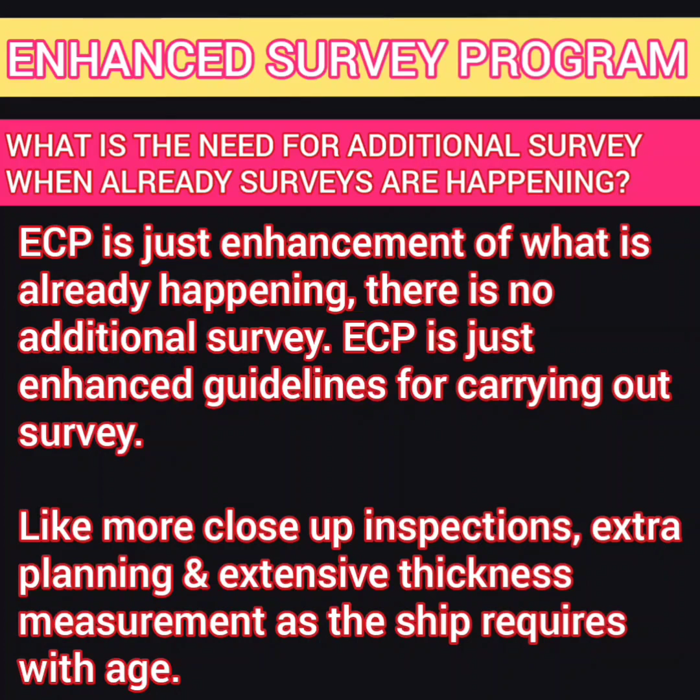Let me quickly tell you the contents of the ESP code. ESP code has two annexes, Annex A and Annex B. And these two annexes are further divided into two parts, Part A and Part B each. Annex A provides you the code on the enhanced program of inspection during the survey of bulk carriers, and Annex B deals with the code on enhanced program of inspection during the survey of oil tankers. The further subdivision basically is for single hull and double hull bulk carriers and oil tankers.

Now we have a code that we need to follow. So how do we execute it? The ESP code has a detailed instruction on the minimum criteria for inspection during each statutory survey. For example, you can see Annex 1 of ESP code defines the requirement for the close-up survey during renewal survey of the ship. Minimum survey requirement from the time when the ship is less than 5 years old to the time when it's more than 15 years old, all the instructions are provided.

As you can notice from this, as the ship ages, the extent of inspection is continuously increased. By the time a ship is more than 15 years old, all shell frames in all cargo holds, including upper and lower end attachment and adjacent shell plating, are inspected.

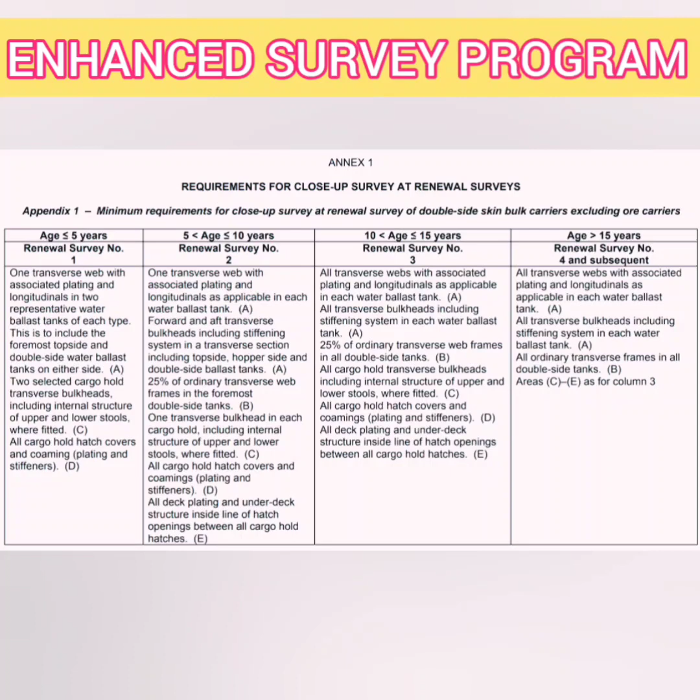Similarly, there is Annex 2 of the ESP code, which defines the requirement for the thickness measurement during the renewal survey of the ship. And from this Annex 2, you can notice that the older the ship, the more detailed and larger extent of inspection will be carried out. Thus, the guidelines given in the ESP code become the first source on the basis of which the survey program or survey planning document is developed.

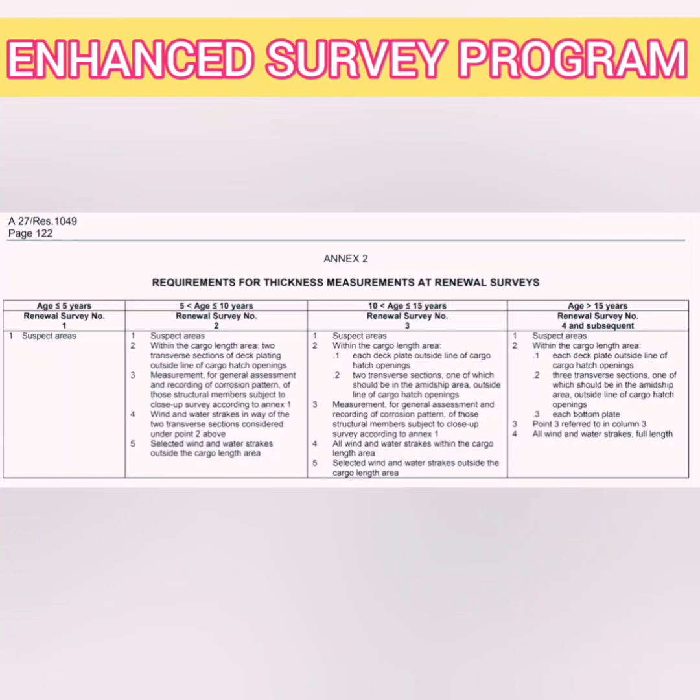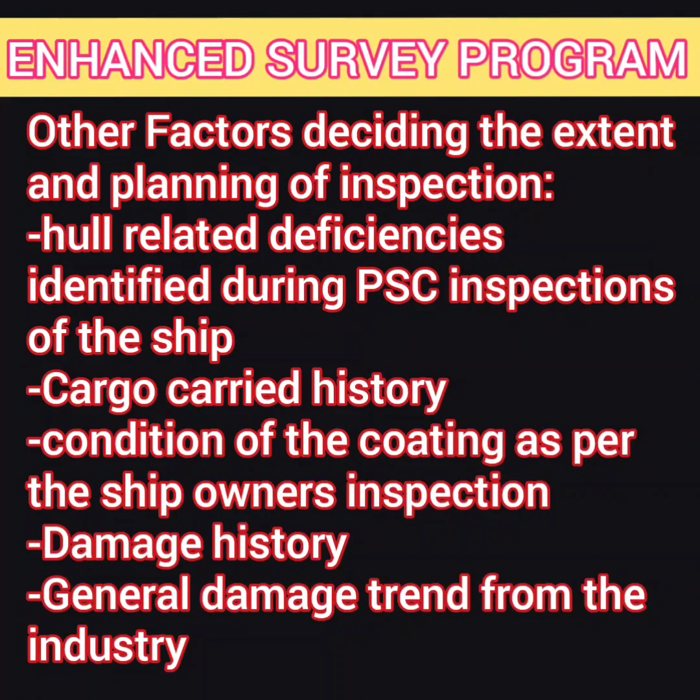Along with the minimum criteria provided by the ESP code, there are other factors which decide what kind of inspection and how detailed the inspection would be. There is a discussion that takes place between the ship owner and the classification society. Based on the feedback given by the ship owner, like the kind of cargo the ship has been carrying, any accidental history, or any suspected areas that have been reported by the ship personnel, or that have come from the experience of a sister ship, or the knowledge from the industry, all these factors together are considered to develop a program under which the ship will be surveyed.

Now that the program is already prepared in advance and the ship owner knows exactly what all points will be checked on the ship, it is the responsibility of the ship owner to keep everything prepared so that the survey can be completed safely. The developed plan is never a final plan. It can always be extended based on the outcome of the samples that are being taken. Let's say, while carrying out the thickness measurement of a particular bulkhead, the thickness is found to be reduced less than the maximum allowed reduction of the bulkhead. Then, obviously, more detailed inspection in that area is carried out, checking more bulkheads, taking more samples in that area.

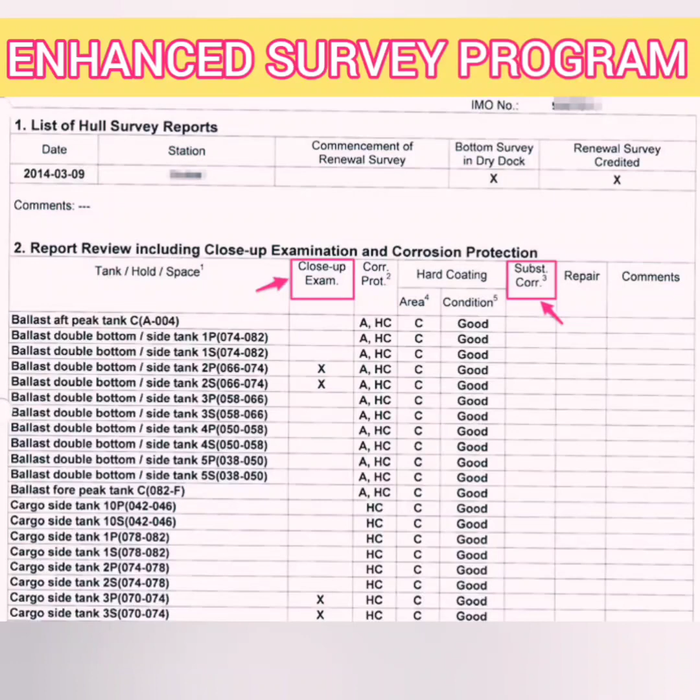Once the survey is complete, it is time for creating the report for the survey that will show the summary of all the surveys done and its outcome. And the report is called Condition Evaluation Report. This report gives the actual condition of the tank coating.

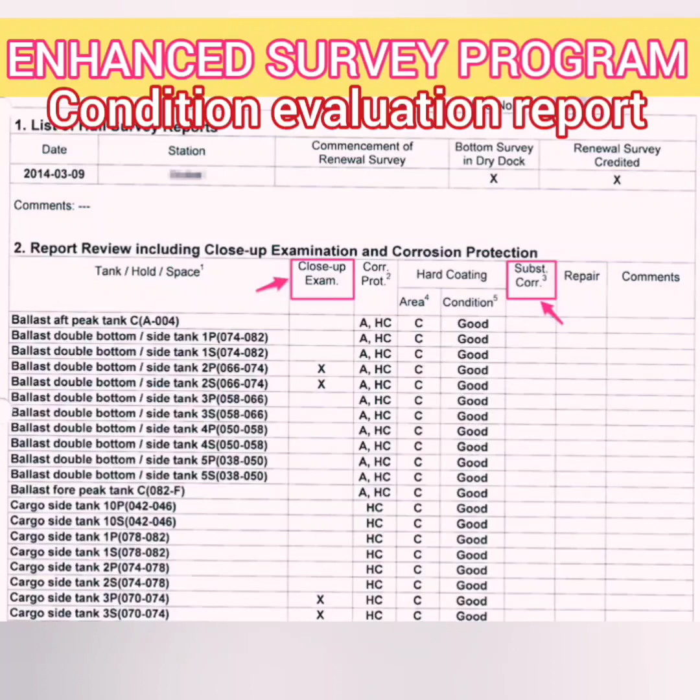As per ESP, the condition of tank coating needs to be defined in one of these ways. It can be called good, fair, or poor based on if only minor rust is there, local breakdown of coating is there, or a major breakdown of about 20% is there.

If a condition of class is issued to the ship as a result of the renewal survey, the details of the condition of class will be provided in the condition evaluation report. Condition evaluation report will also have the details of any memorandum of class issued to the ship.

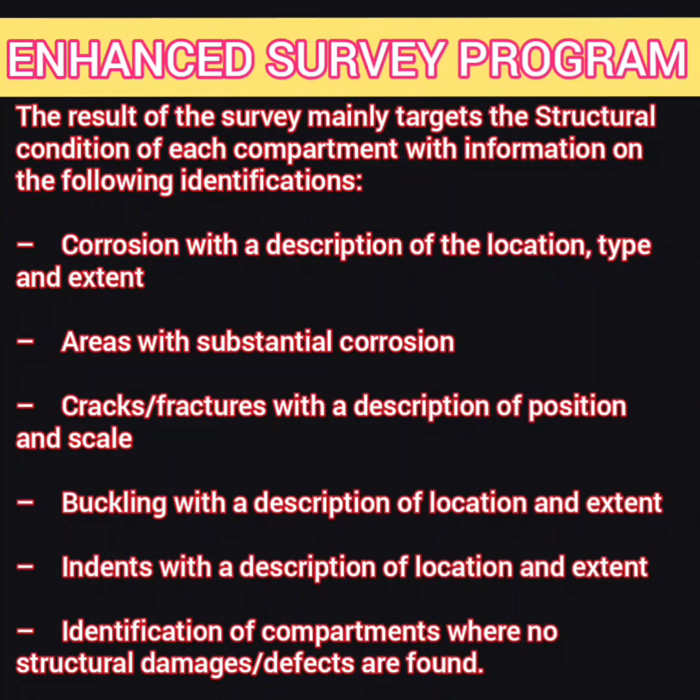Condition evaluation report also documents and highlights any area that has been observed to have substantial corrosion. The same report will also provide the summary of thickness measurement that was carried out and any area of concern that is identified.

So far, you know what is ESP code, you know how the survey is done, how it is planned. Now that the survey is finished and the report is made, there is a file that you need to maintain on board which is called ESP file. And this file contains survey report related to hull structure, the condition evaluation report, the thickness measurement report, and master has to make sure that these records are available in the ESP file. This file gives detailed information to the crew members and gives guidance when they carry out a routine inspection in the future.

And before I conclude, there are some important definitions as per ESP code that you should know. First is critical structural area. What this means is a location which has been identified from the calculation to require monitoring or from the service history of the subject ship or from a similar or sister ship to be sensitive to cracking, buckling or corrosion which would impair the structural integrity of the ship.

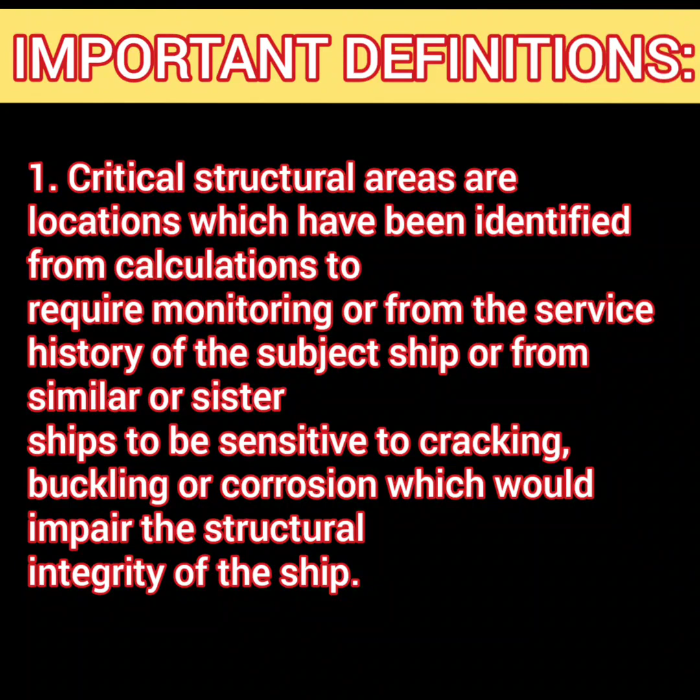Then second is overall survey. Survey intended to report on the overall condition of the hull structure and determine the extent of additional close-up surveys. The third is close-up survey. That is a survey when details of the structural component are within the close visual inspection range of the surveyor. That is normally within the reach of hand. Next definition is suspect areas. This is the location showing substantial corrosion and/or considered by the surveyor to be prone to rapid wastage.

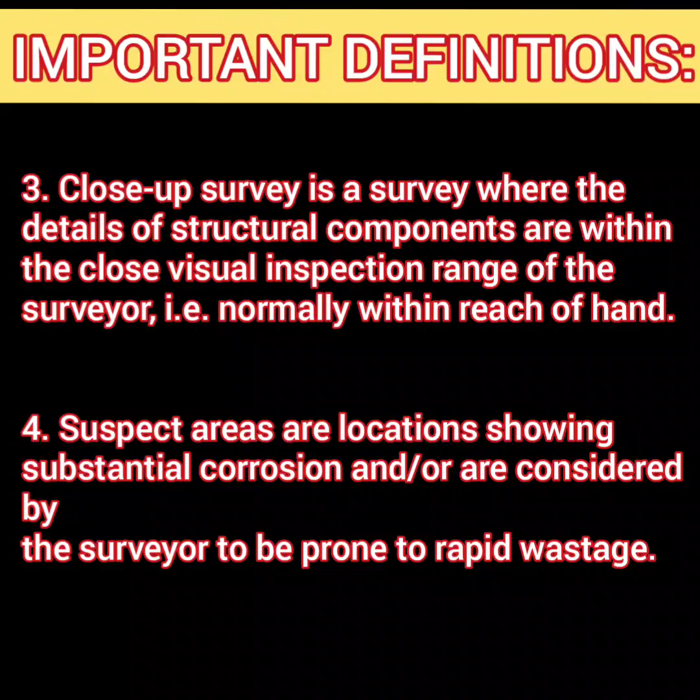To understand these definitions, think of them like this. Before you start a survey, there is a report that is made. You consider the history of the ship and you consider all the information that is received from the sister ships or any other source related to this ship and decide which may be the critical areas which should be properly checked.

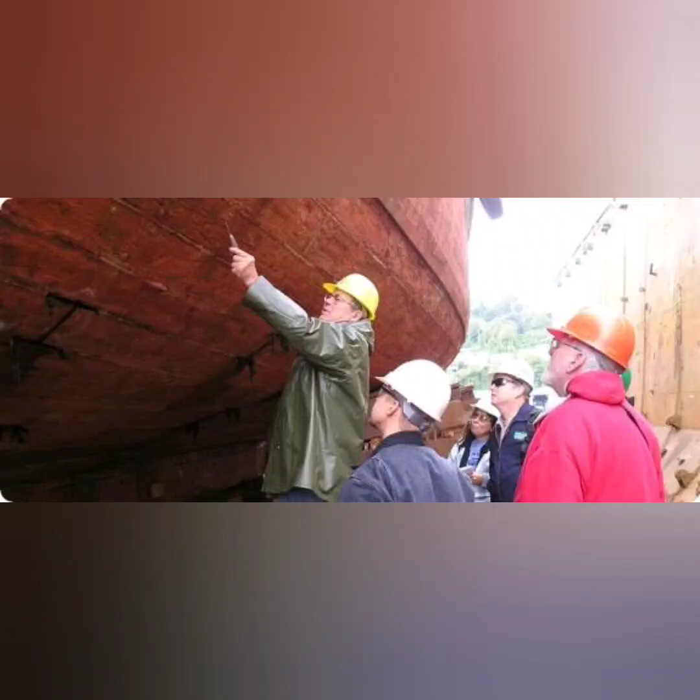And then, when doing the survey, there are two kinds of things you're doing. Either you're making an overall survey, that means looking at the overall condition of the hull structure without going into the details. And the next stage is close-up survey, when the surveyor needs to get really close to the structural component and identify how's the condition of it. And during the close-up survey, he may find a suspect area. Suspect area is basically where there is substantial corrosion or an area which the surveyor feels is prone to rapid wastage.

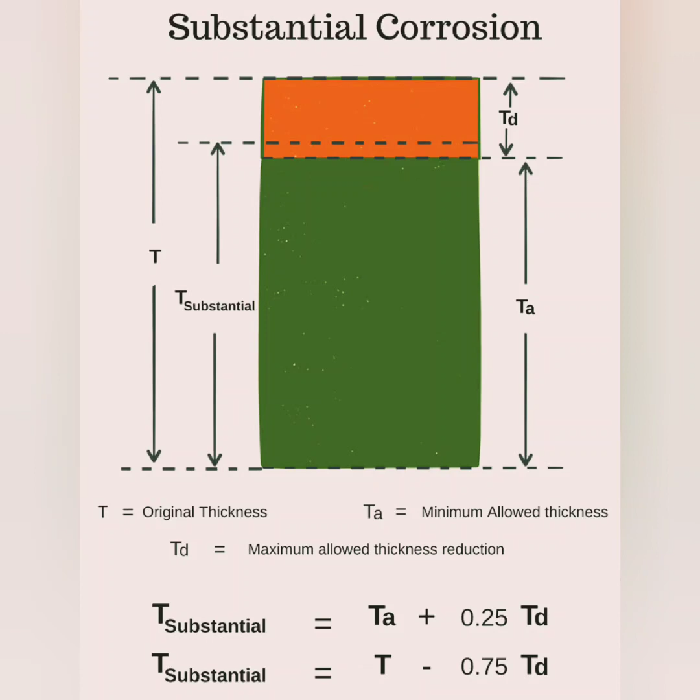And the last term you should know is the substantial corrosion. Substantial corrosion is an extent of corrosion such that assessment of corrosion pattern indicates a wastage in excess of 75% of the allowable margin, but within acceptable limit. To understand it better, here is a diagram that explains it. In this diagram, the orange part, TD, is the maximum allowed thickness reduction. And if this allowance gets used up by 75% or more, that is considered substantial reduction or substantial corrosion.

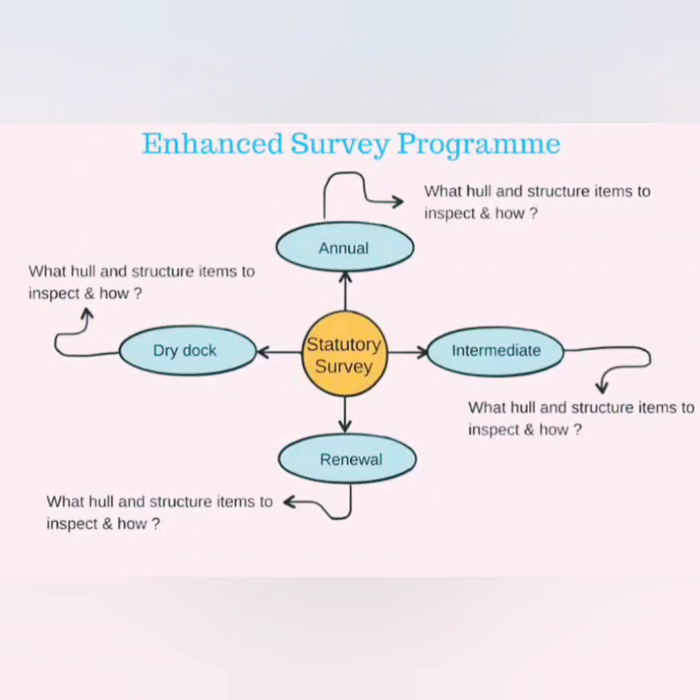Finally, I conclude that there have been risks which were found higher for the bulk carriers and tankers. Thus, an enhanced survey program was created for them, which basically meant that the general surveys that are happening for any ship are enhanced in the case of bulk carriers and tankers. With prior planning, along with the ship owner and class, a program is developed for how the survey will be carried out based on the reports that were created from the ship and what is required as per the ESP code.

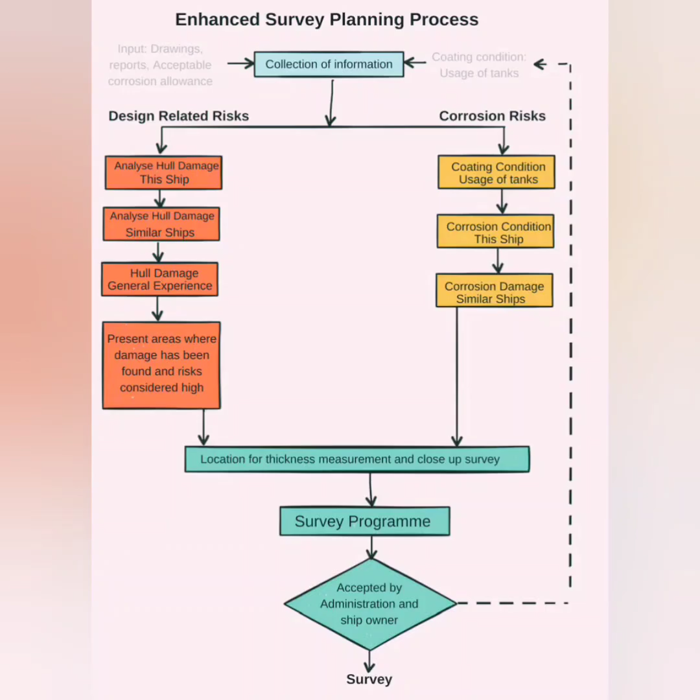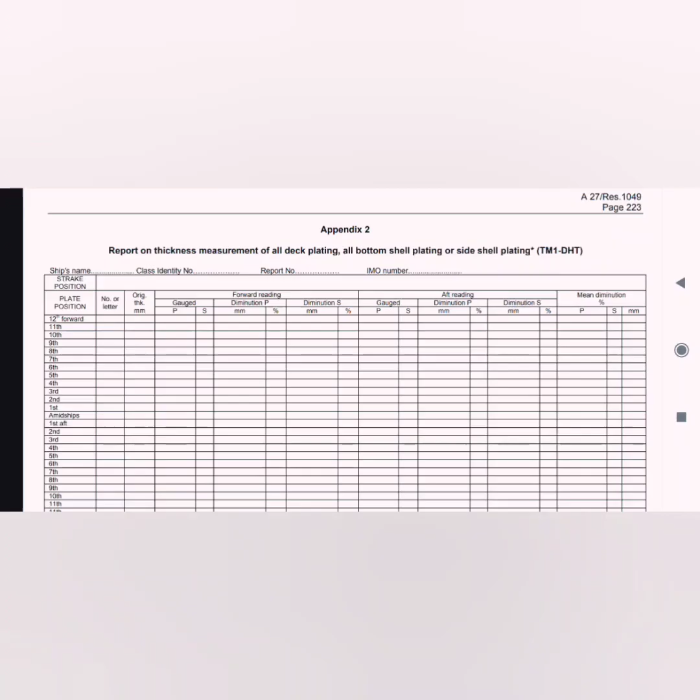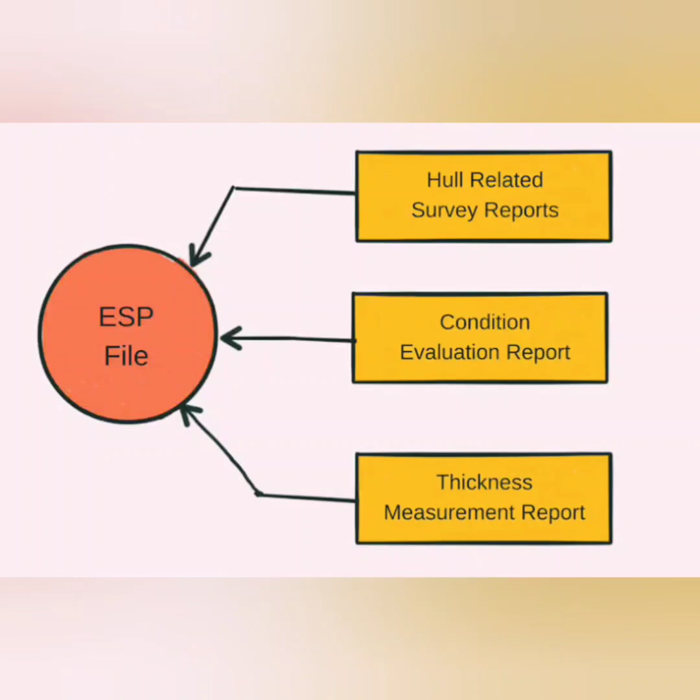Once the survey is complete, a condition evaluation report is made based on the outcome of close-up and thickness measurement inspection. Then finally, it is all put in the ESP file, which contains hull related survey report, condition evaluation report, and thickness measurement report, which is used by the ship personnel for the future surveys and also used during the next renewal inspections.